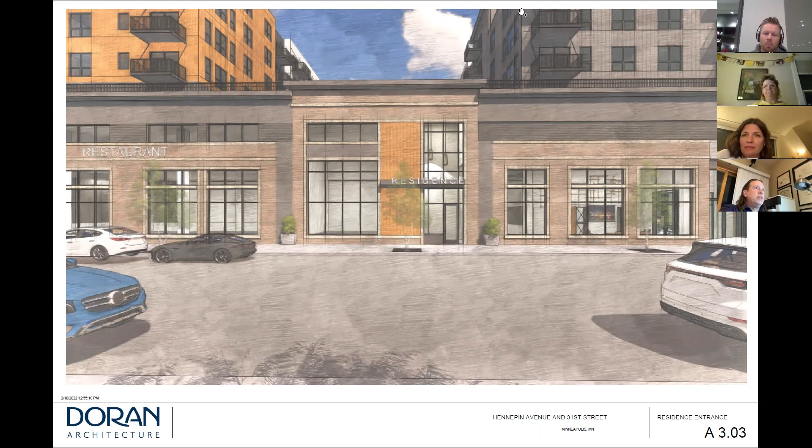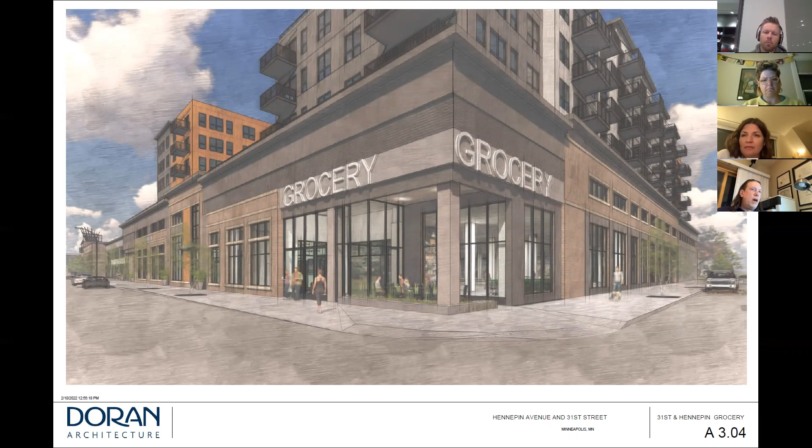This is the corner of 31st and Hennepin, where the proposed grocery entrance will be, and there's also another outdoor seating area at this entrance as well. This is just another shot of that same angle. It shows the architecture of the residences a little bit better in this view.

So this is a look on the corner of 31st and Girard. One thing I want to point out here is that this area, where there's a blank wall, is where the parking ramp on the inside goes up here and goes down here. So there was a blank wall there, and we really wanted to activate that wall. Our ideas are to provide a public art installation with local artists. We haven't fully designed that yet, but we have some ideas to make that a really prominent corner with some local art.

Some of the things we're currently working on are refining the architecture of the residences, and in addition we're working on really defining this pedestrian path through Girard. So those are some comments we got from other neighborhood groups, and those are some of the things we're working on. So I'm excited to hear your comments, and we're here to answer any questions.

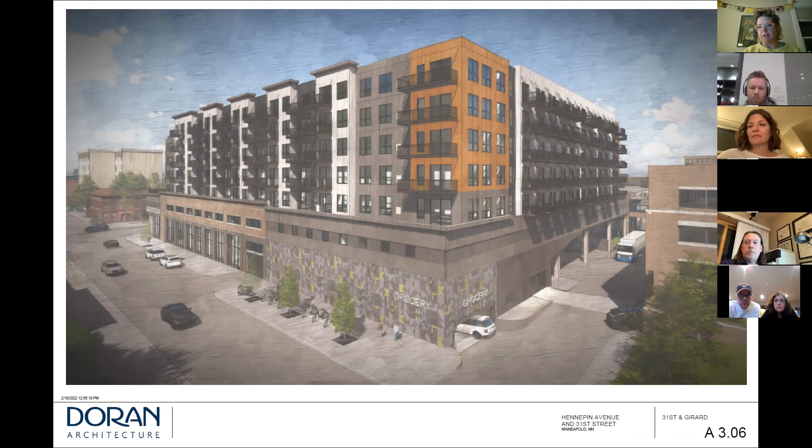Oh, I see there's already a couple questions up there, but I just want to ask one thing real quick. I just want to understand the limits of the scope of your project. I know you mentioned some pieces of the existing retail with the stair that you'll be working on at that threshold of this new development, but to what extent does the scope of your work affect the interior layout of the retail or anything else that happens north of that stair component?

Yeah, great. So we'll be remodeling the common corridors. In addition, there's a new tenant coming from some of the owners of Can Can Wonderland. It's an art and rec space, so they will be doing a project in this corner here.

In addition, we're relocating the Jimmy John's here. And then there's some talks about what to do with the existing H&M space. I don't think those have been fully realized yet, but the scope of our work is mainly those common corridors.

And just one other thing to add, the big escalator that exists will be gone. You can kind of see it here, but it will feel very different than it does today, because you won't have that big mass in the center. So there's a facelift that will happen, and some of that work is TBD depending on how the tenant mix takes shape, but there is a scope that addresses the interior of the existing center, to remodel those corridors.

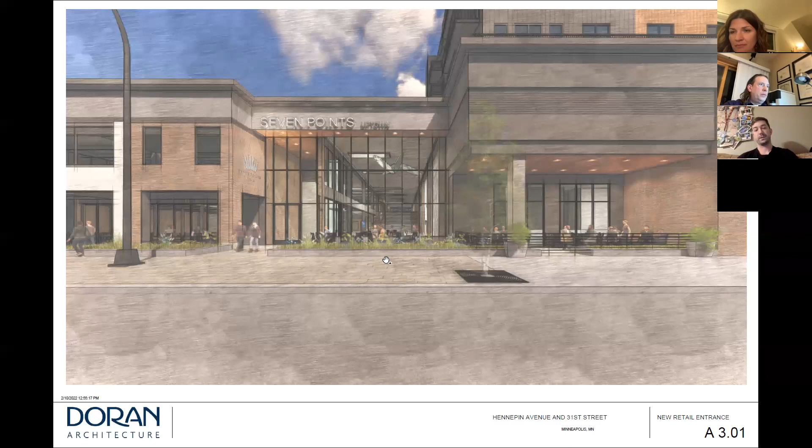I know it's not my turn, but just to clarify: what is the number, for the residential level, of parking you're providing as a per-unit calculation? So we're providing 116 stalls. Let me do the math quick here - 116 stalls and 264 units, so we're below a 0.5 ratio per unit.

Okay, I just want to clarify that, because the rules around maximum parking have recently changed, and I want to make sure people know that too - it's not like we're providing 2 parking spots for every unit up there.

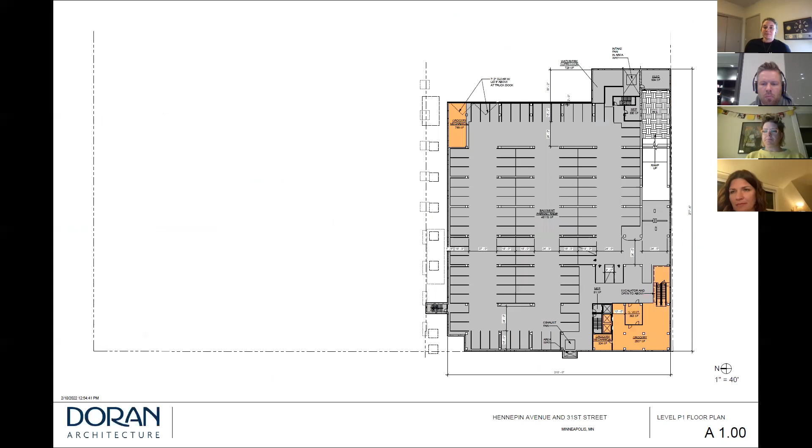Okay, I think next up, Kevin. Hey, thanks, and glad to hear that you're interested in repurposing that. I'm one of the folks that sees better value for flexible uses, not just storing automobiles, so I appreciate the flexibility. My question is about the housing mix in the proposed development - type of unit, size of units - and a little more interest on the affordable housing component you talked about.

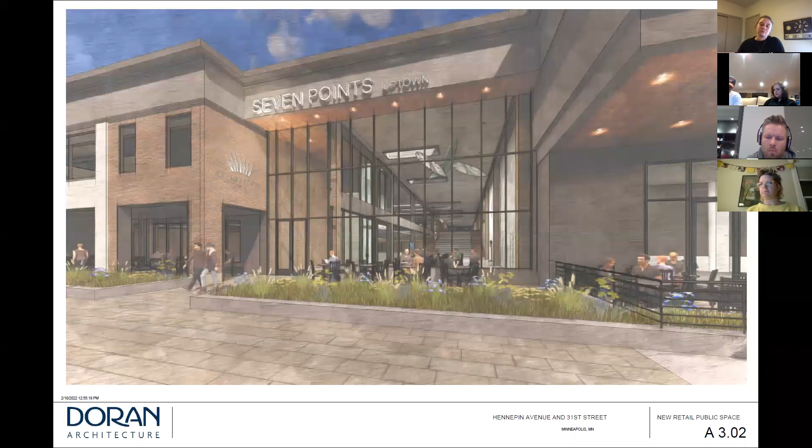Can you remind me of that - what that would be on the Lake Street frontage, is that part of the Doran property, or is that part of the other property, right? I'll talk about that, and then John can jump in with more details on the unit mix.

There are multiple ways we could comply with the Minneapolis Affordable Housing Ordinance. The preferred way, because we think it would benefit Uptown, is that Common Bond would do an affordable development as part of this entire project, on that Lake Street parcel. But we're at the early stages of working through that, and I don't want to promise something and then have it not work out. So that's the plan as of right now.

If that doesn't happen, the other way we could comply is having affordable units within this project. Those units wouldn't be any different - you wouldn't know which units are affordable. They'd just be a certain percentage of the units in the building designated affordable. We've done that in a number of other projects and it works as well, so that's an alternative. But right now the focus is the 100% affordable project on Lake Street through Common Bond.

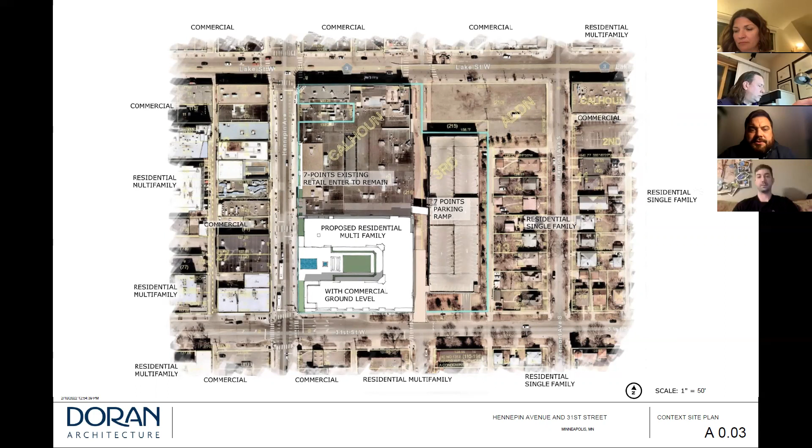And then, just to follow up, the housing mix - studios, 1s, 2s, what are those? John, you want to touch on that? Yeah, absolutely. We have a mixture of alcoves, studios, 1 bedroom and 2 bedrooms. Our smallest alcove is just under 400 square feet, and our average 1 bedroom is about 584 square feet. So we have a mixture of different unit types and sizes.

The total number, you said 264? We're at 264 presently, yes. Awesome, thank you.

I think if I'm keeping track right, Rose, you're next. Thank you. I have a question about the Girard portion of the street, and you kind of touched on this, that this is probably feedback you've received before. I'm curious, I love the idea of activating Hennepin, that area has so much potential that isn't being utilized, so the seating there is really key. I'm also curious about the pedestrian space behind the building, throughout Girard. I know previously there were restaurants there that gave a little more life to the space. But especially since some of it looks like loading docks, what's the plan to create a safe, welcoming space that people want to be in, as opposed to a space someone just has to walk through to get where they're going, since I live in the area.

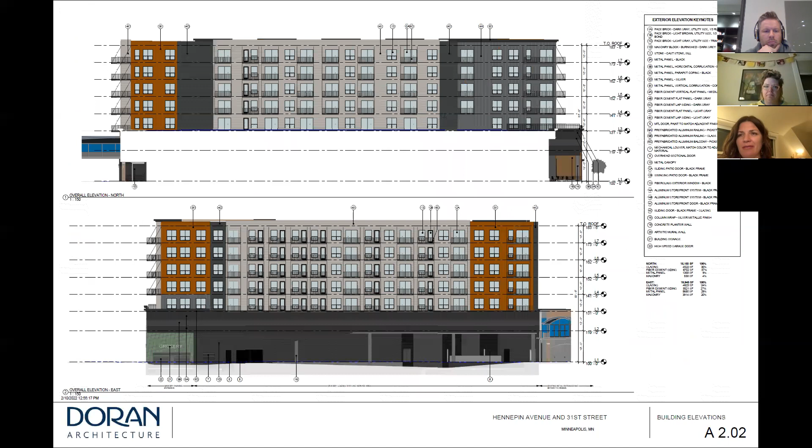Adding to that, that kind of rust color you saw in the renderings, we're looking at different materials, but we want that to be some type of architectural metal panel that will pop and look different than the other materials going on there. It's hard to get that feel from these renderings, but that's the idea.

One of the logistical challenges with this building, and I'll back up a second, we've done buildings where we've taken brick up higher than we're intending here. That's part of the challenge of constructing in this location, which is very urban. It's going to be a tight site. The construction logistics plan needs to be dialed in, and when we do the grocer space, we need to have that ready so a grocer can come in, get that built out, and opened on their time frame. If we're putting brick above, that's an element of our construction process that potentially can cause issues from a schedule standpoint and could impede that time frame.

So as we looked at this holistically and our strategy for this building, it was one of the things we talked through, and the two big drivers are the tightness of the site and the time frames we know a grocer will require. That drove the decision to look at and utilize the materials we selected for the upper portion of the building.

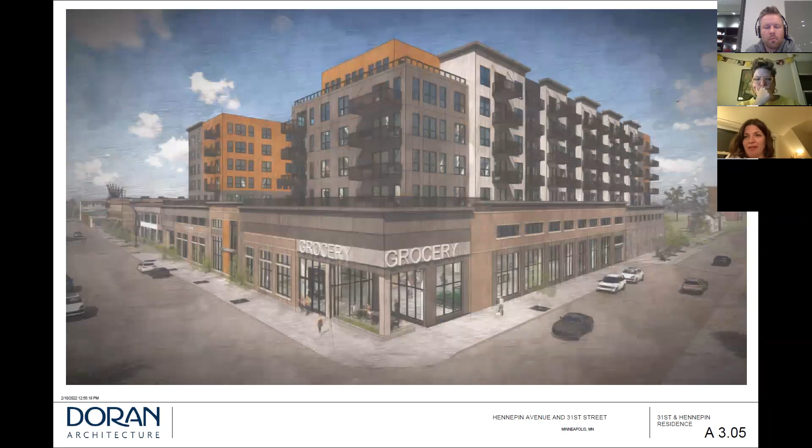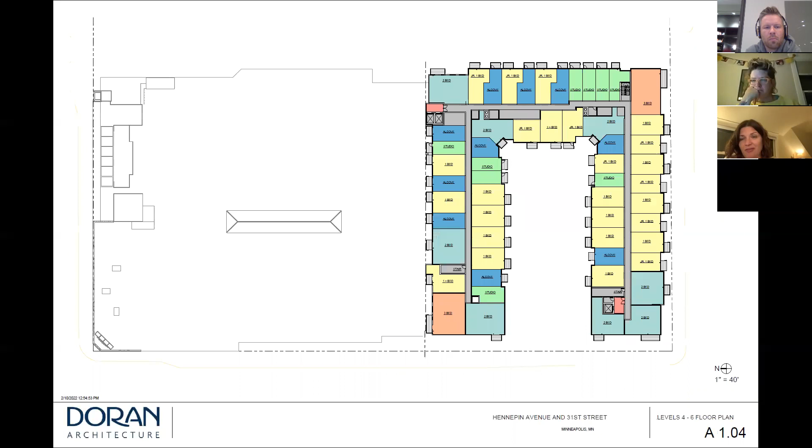We did study moving it around the corner extensively, and with the floor plate a grocer will require, plus vehicular access there and the circulation in the ramp, there wasn't any way to make that work. That was kind of where we started, but as the design evolved, we really liked this location because it's a nice complement to the new entry to the center, and it works really well for how residents will circulate from the street experience through the building.

I guess in the absence of other questions, I'm going to ask more of my questions. What time are we at? Am I way over time? Oh, I am over time. Okay, my other two questions are very brief.

We have this tremendous roof that all of your residents are looking down on with the existing retail. I know this might not really be your scope, but is North Pond considering developing that sort of fifth elevation? Is that an opportunity for green roof? Is that a solar opportunity? Not a super great solar opportunity, I suppose, but could be things we might be thinking about, especially if Can Wonderland's already going to be up on the roof.

Yeah, we're just getting into the design of the retail part of it. There has been some discussion about if a restaurant goes into one of the second floor spaces, whether you activate the roof similar to Can Wonderland. But I don't think that's been fully realized yet.

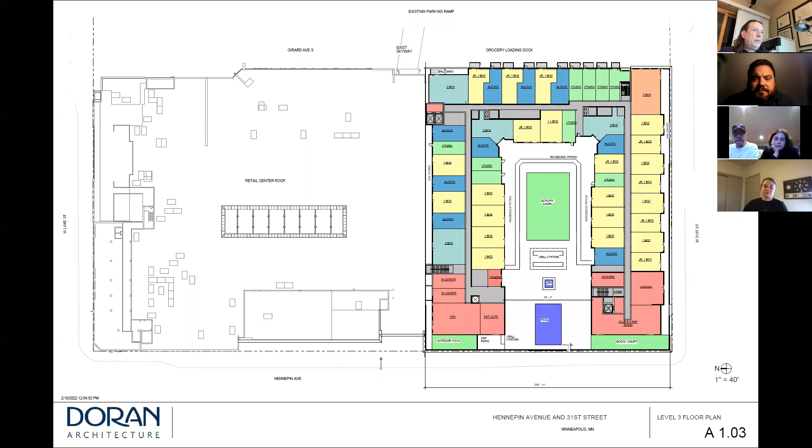And would there be access in and out of the grocery from the retail? Right now on Hennepin and 31st, we don't have a grocery yet. That will really depend on what grocery we get, if they will allow direct access. But right now we are showing a door into that grocery from the residential lobby. Looking at the design, there won't be access to the grocer directly from inside the center. Correct. This access here is for emergency access only.

Scott, did you have another comment you want to make?

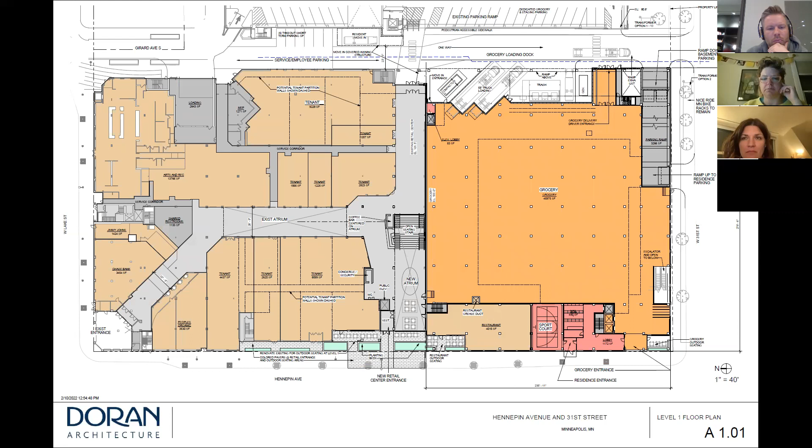Am I looking at this right? On the second floor of the building, there's a parking ramp. Is that this one? Yes, that's the second story, so above the grocery tenant, will be resident parking. So there's 116 stalls for residences.

My last question, which might help clear up some confusion about where the retail component is at versus the residential component. Can you give us an idea? First off, clarify as I'm understanding it, this residential project is one project, and the retail project is like a separate scope or contract. Is that accurate? Kind of.

I know you're thinking about them together, but the reason I asked is my real question is about schedule. Where are we at with the current schedule on the residential portion of the project, and where are we at with the schedule for the retail remodel?

So the plan would be, if we get this project approved, we would start construction of everything that's happening at the same time. The excavation, demolition, all of that work would start to happen. Then there's kind of a line you see in the plans here, where we'd have a construction team working on the retail side, and a separate team, all part of one big team, really focused on the residential.

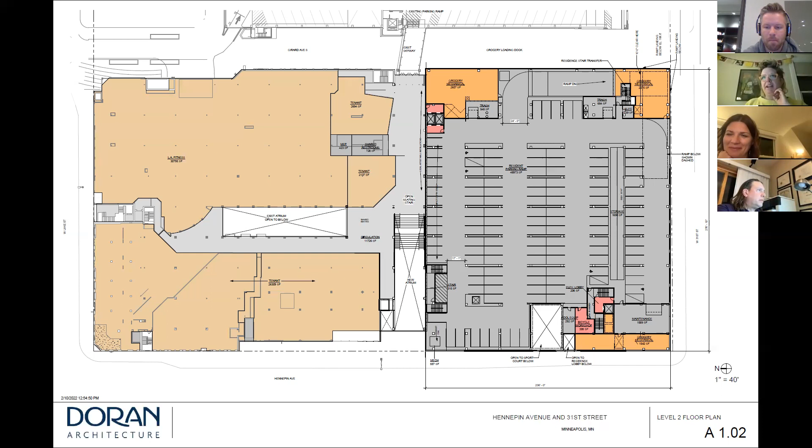So we do have a couple of other brief updates, like neighborhood updates.